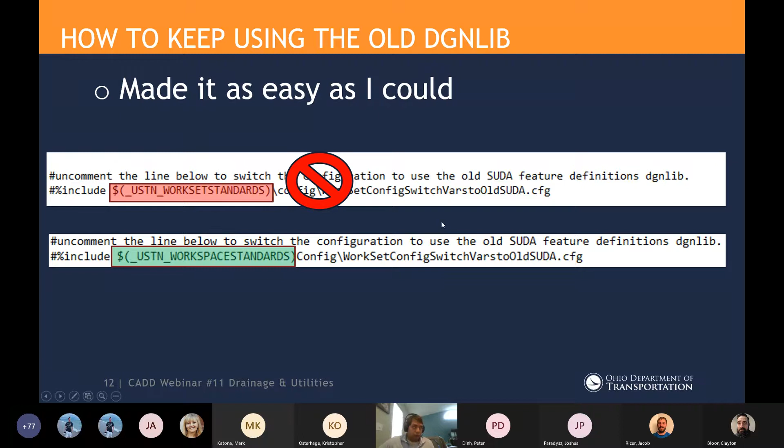Feel free to reach out to me. I've been kind of afraid to push out this DGNLIB if you haven't been told, because the break when I push it out is a little worrisome to me. So I've been holding off on it, but I think it needs to happen. There's a lot of good stuff added in the new version.

So when will I do this? Really soon, hopefully. I'm in the middle of still writing some documentation, but I will put out a mass email to the DRC mailing list to let everyone know before I push it out and what needs to be done on your current setup. This right here is how you can sign up for our mailing list if you're not on it.

Another thing I've been toying around with is releasing the DGNLIB alongside 2020 Release 3, but I might not do that now that I've been testing 2020 Release 3 of ORD.

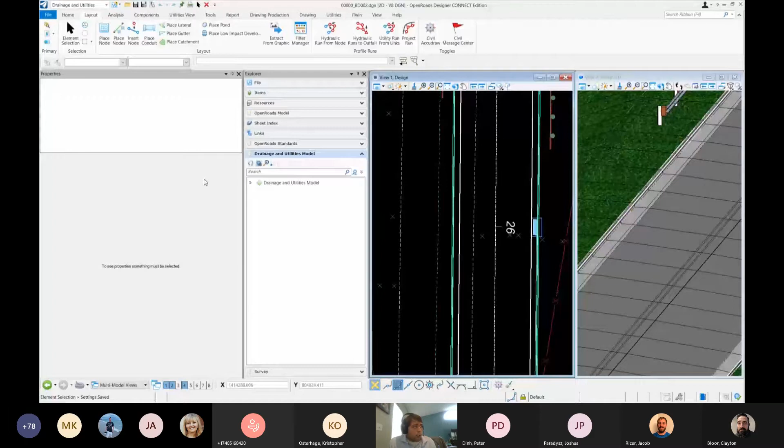So now let's get into actually placing something. We're going to use Civil AccuDraw to help us place this, and we almost have to do that if we want to annotate station offset later on. Let me come up to the tools in the drainage and utilities workflow, and under the layout tab you're going to see a whole bunch of layout options. So we're going to go over the place node, since in order to place conduit, you've got to place that node first.

I'm going to select that tool, and then we're going to select the feature definition, which is the driving factor between everything we pretty much model in ORD. I'm going to grab the CB3 curb and gutter proposed feature, and you can give it a name, so I've set it up to be D-1, and that'll auto increment as you place more. Depending on what version you have installed of ORD, that dialog might look a little different, but overall it's the same. I want to make sure I turn on my Civil AccuDraw.

I just toggled that on. I want to make sure I'm on the station offset ordinate, so that's like an assist to the tool — it's going to assist me in placing it.

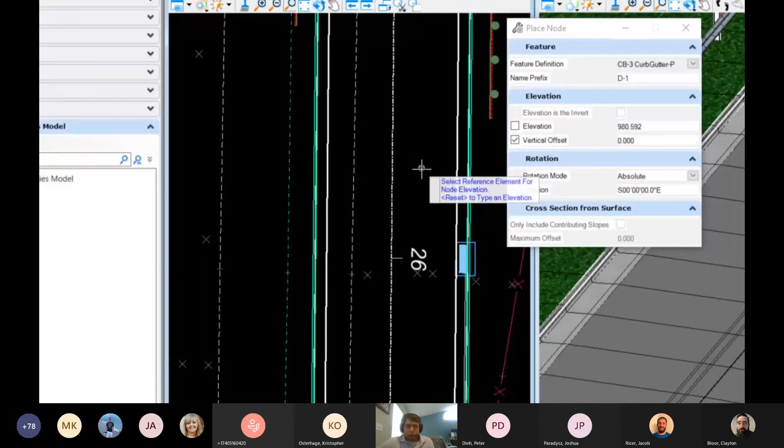Now it's asking me the reference element for node elevation. This is what you can use to pull the elevation, to place that ground elevation of your catch basin. I'm going to actually select my gutter line to grab the elevation, since I know that's where I want to grab it from. So I'm selecting that gutter line, and it's going to use the elevation of that gutter line to place the top of my catch basin.

Now it's asking me if I want to put in a vertical offset. Here's where I was talking about depressions — if you want that half inch depression for your catch basin on your curb and gutter, you want it to be half an inch below that gutter line. So I'm going to type in a negative, and you can do simple math like I just did, 0.5 divided by 12. That's going to say go a half inch below that gutter line elevation. So I'm going to click to accept that.

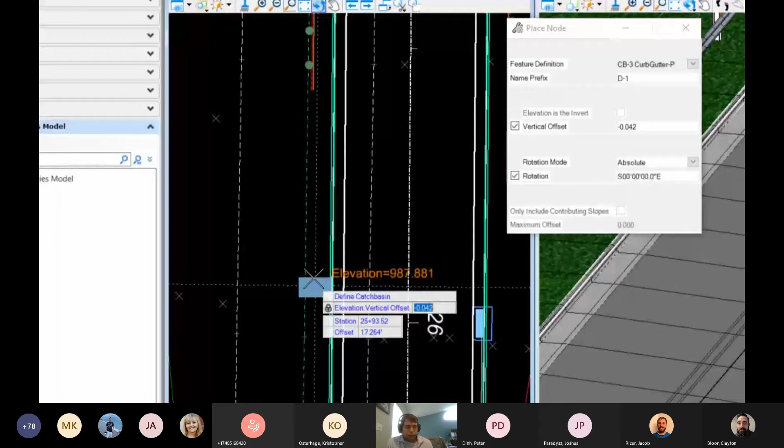Now I can use Civil AccuDraw to help me place this. I have Civil AccuDraw toggled on, so I'm going to toggle over to that. I'm going to hit the O key to select my reference, and then I'm going to key in the station I want and the offset that I want. I'll lock those in, and then I will click to accept.

Now we have the next option, which is the rotation. There are two options: absolute or relative to alignment. This was added, I believe, in 2020 release 1, which we should all be on — the option to rotate about an alignment. This is really cool because now I don't have to figure out the absolute rotation I need. I can just select relative to alignment and choose the center line as the rotation reference.

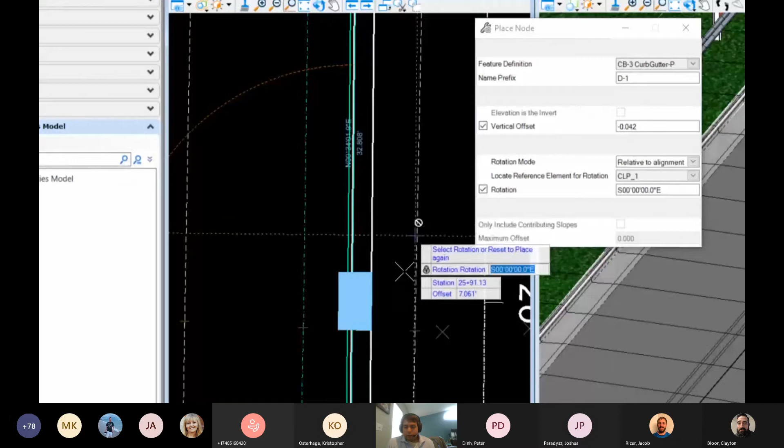Now if it's coming in at the right rotation, that's great, but if it came out like maybe 90 degrees off, then you could just key in 90 degrees and get that rotation set a lot better than what it was before they added that feature. So I really do like that feature — it made it a lot easier to place.

After you set your rotation, you're going to click, and it's going to place that in 3D and in your 2D plan view. So on my 3D side, you'll see that it is below the gutter. That's because we did add that 1/2-inch depression.

So we can come in and shoot that gutter down right there. I did go over that in the February meeting. I don't think we have time to go over it today, but maybe I'll have a video on our wiki page to show that. But mainly, that's how you place a node.

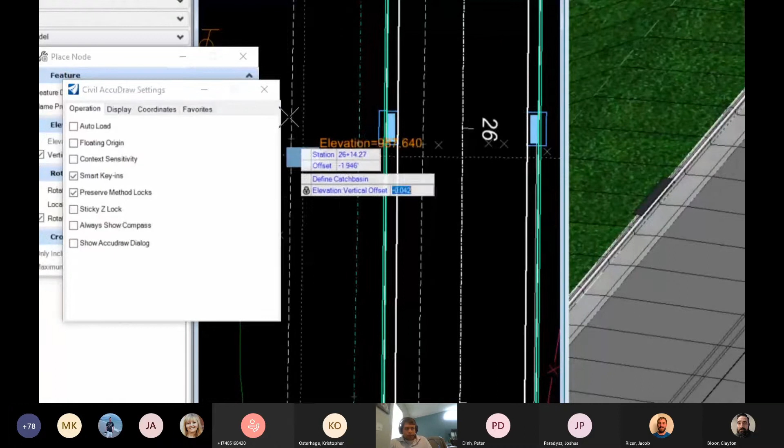So let's place another one. Another thing I wanted to point out is in our Civil AccuDraw settings, if you have floating origin checked on, you'll notice that when you place your next catch basin, it loses the reference to the center line. With floating origin on, it's going to use your last click point as the new origin point. Honestly, I would check it off—it doesn't really make sense to be on, because when you do station offset, it doesn't make sense. So if you're running into that snag, that's what's going on. Just check that off and it'll make it a lot easier.

So I'm going to come out here and place another one. I wanted to mention that if you're going to switch sides, make sure you reset click and choose the new reference element for your elevation, like I'm doing here, because it's going to remember that from the first one you placed, since you never got out of the tool. So if you switch sides, don't forget to switch that reference element for your elevation.

And you don't have to use that line—you can use a surface too. You don't even have to use an element; you could type in the elevation you want for your top of catch basin or manhole. So if you reset click, you can type in the elevation. You've got a lot of capabilities there. I'm just using that line because I know that gutter line is the elevation I want to hit, but you can definitely use any surface available to you, even the existing terrain.

All right, so I'm going to place another one in here. I think it went like 100 feet, and I'm just going to place that. So we need at least 2 nodes to place our conduit, right? So I place that in.

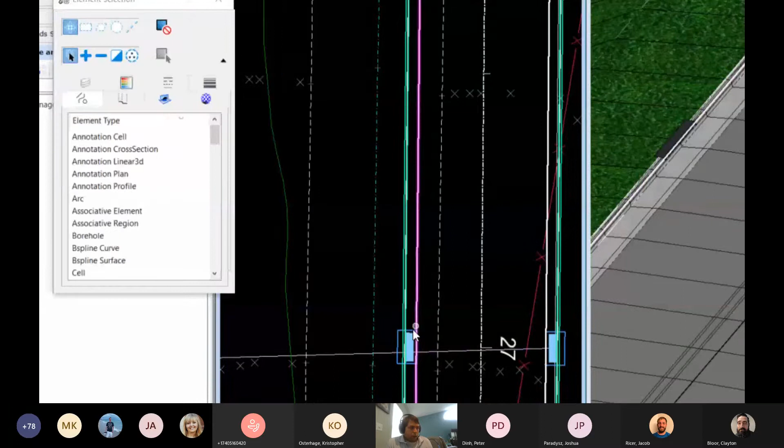And now we can select that node and easily modify it after placement. There's a ton of properties there—you see the invert elevation, the vertical offset. Notice the ground elevation is grayed out; that's because it's tied to the reference elevation element you selected. So if you cleared out that elevation reference, you could actually key in that elevation if you wanted to. You can easily select that node and move it around—they've got little heads-up arrows. You can even click on that station or offset number and key in a new value if you wanted to. So pretty easy to edit.

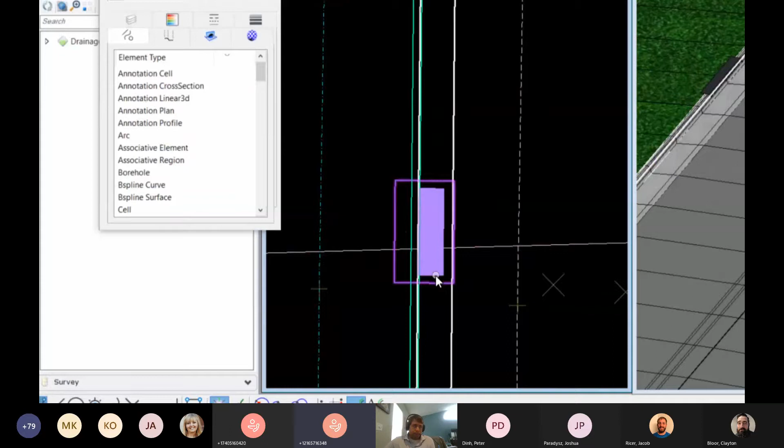You can also open the utility properties, which gives you a lot more on the utility or drainage side. One thing I want to mention is in the utility and drainage properties, I'm making use of the notes field for annotation later on. The new dgnlib has the notes filled out, but that's typically what we use to annotate in the profile view. If you're using the old one, those aren't filled out, but you can easily fill them out, which I'll show later.

So now I went over to place conduit, and now I'm going to place a conduit. We're going to set the feature definition—here's where you can see all the different feature definitions. We have type A, type B, type C, and so on. I'm going to choose, I believe, the type B round.

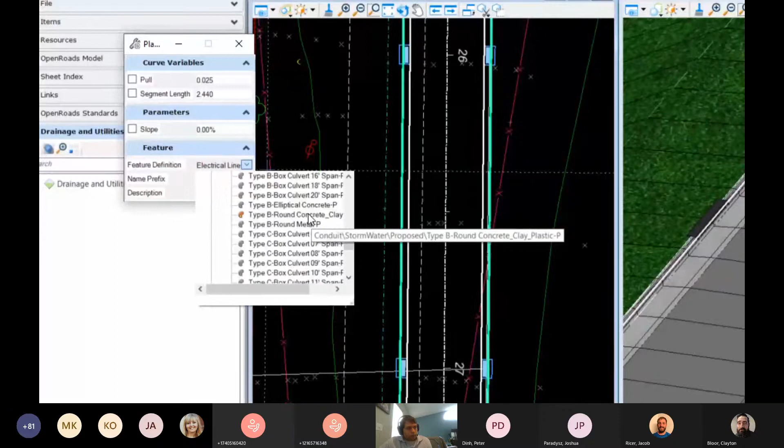So I select it, give it that name, just like for the conduit. And then the description is actually the size. You can see the type is coming from a conduit catalog, telling me it's using what we defined on the prototype. So the old DGNLIB, you wouldn't see that, it would just be set on the feature definition. But that's what you should see now.

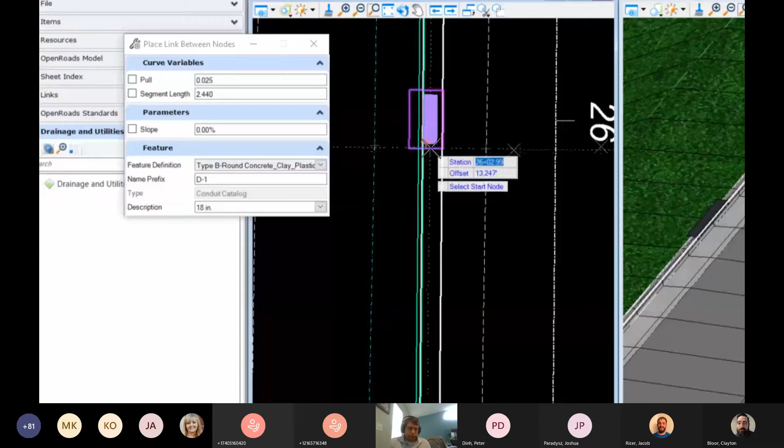So I'm going to choose my size, and then I'm going to place this. The way you place it is you choose the connecting node, and on that node there are connection regions set up, basically the area that you can connect to on this node. When I made them, I just threw it to the center of each side. On hindsight, maybe I should have made it wherever you wanted to place it, but I could change that if desired.

Right now it's just going to snap to the center of the side that you're on. So I'm going to click and place that, and I will have the conduit placed now. I think I had the level turned off, so it will place a line in 2D and model it in 3D, which I'll show here in a second.

Forward a little bit. Yep. So you can see when I rotate it around, there's the 3D model side of it, and there's that 2D plan.

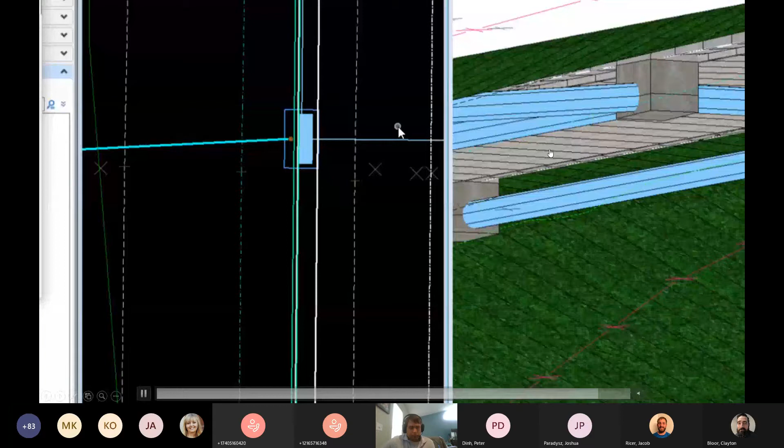So what I wanted to mention is right now I've got a service request into Bentley, but the way the software works is you're going to want to set the catch basin invert last. So what I should show here, I'm going to change the pipe invert, and you're going to see that as you change the pipe inverts, the node is going to move with it. If you have the node going down lower or something, you're going to see that change when you change those pipe inverts.

So the right way is to set the pipe inverts, then set the node invert. Now, if your node invert is just going to be the same as your pipe invert, then you don't really notice it. But I do have a service question with Bentley on that one because that does get a little bit annoying. But so that is the gist of placing it. It's actually fairly simple to model.

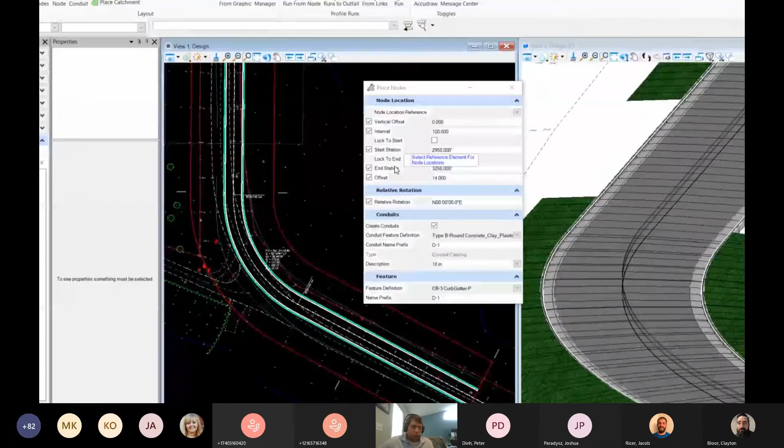So I did want to show a new tool here. This tool is new to ORD 2020 Release 3, which just came out a couple weeks ago, so we are testing that right now. It's not really in use in the districts just yet, as we're still going through and testing it. But the place nodes tool is actually pretty cool, so I figured I'd show it so you guys see what it can do when you get the next release.

It basically allows you to place multiple nodes all at the same time, and even place conduits as well at the same time. So this is really good if you're going to go along a gutter line or something, where you've got a bunch to lay out every maybe 100 feet. So I figured I'd show it real fast.

All right, so in here I'm going to set that vertical offset if you want that depression added to your catch basins. Then I believe I'm going to set my feature definitions, which is already set - the feature definition at the bottom there, CB3. Then if I want conduits, you check on conduits, and you can choose the feature definition to use for the conduit, as well as the size. Now, since it's placing it all at once, you really can only choose one size and one feature.

So to use this tool, it's pretty easy. It's asking for the reference element for node location - note it says location, not elevation. So I'm going to select my center line for the node location. And now it's asking me for the elevation, which is what we just saw in placing a node, so I'm going to use that gutter line again, just as I did before. So I'm going to come in here and select my gutter line.

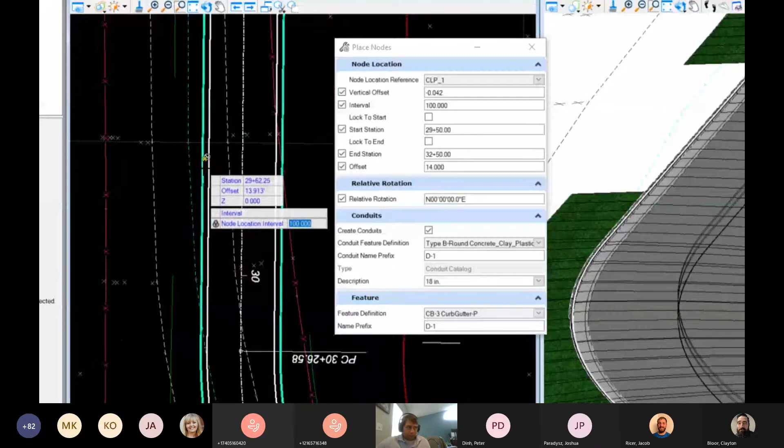So you had one more option there, and it was the location reference. That's what you're going to use to kind of lay out multiple nodes - it's going to follow that location that you selected. So there I am selecting that elevation. Now I can set the interval, so how often do you want your nodes - maybe every 100 feet. So click to accept that.

And now, where do you want to start? What station? So you don't actually need Civil AccuDraw for this tool because it's built into it. Kind of, not Civil AccuDraw isn't built into it, but it's generally the same. It's asking you for a start station, based off of that element for the location that you selected in the first step.

So I'm going to select that. You notice a graphic's going to start popping in there. And then after I select the start, then I can select the end station, however far down I want to go. And then I can set the offset, so how far do you want to offset from that location reference?

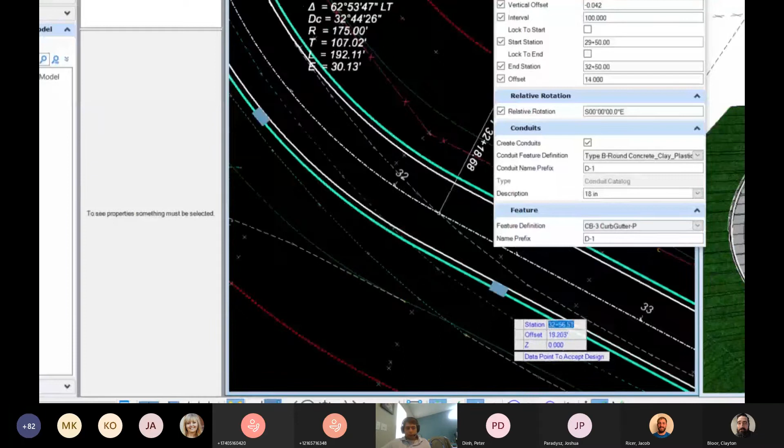So 14 feet. Okay, so now you get that same rotation option. And granted, this is where that relative to alignment rotation option really shows its power here. I noticed that my rotation was flipped off 180 degrees, so I flipped it, and I got that rotation set right now. So I'm going to click to accept that rotation, and then one more click to actually accept the whole thing.

So I should be doing that right now. It's going to go through, it's going to place all those nodes and the conduits all at once. So you can see those conduits come in as well. So it's a pretty cool tool.

So again, that's not in what you guys have right now. You don't have this tool, but it is in 2020 release 3. So after we're done testing it, we're going to vet it out, make sure there's no real problems with it, and then we'll see about pushing it out to everyone to have.

So again, you can look at the properties here. These are just the same as what we did in the previous video. You can easily move each individual one around all you want. They're just showing you some in 3D that they did place.

All right, let's move along. Okay, so that's really the placing that I'm going to go. And now I'm going to go into kind of setting up for sheet creation.

So the first thing is profile runs and projecting those runs. And what does that mean? So those drainage elements, that network that we just placed, they're each individual pieces. You've got nodes, you've got conduits, right? That's when we go to create our plan profile sheets, we want to show that on our centerline profile, right? So what we need to do is actually project that drainage network onto our centerline.

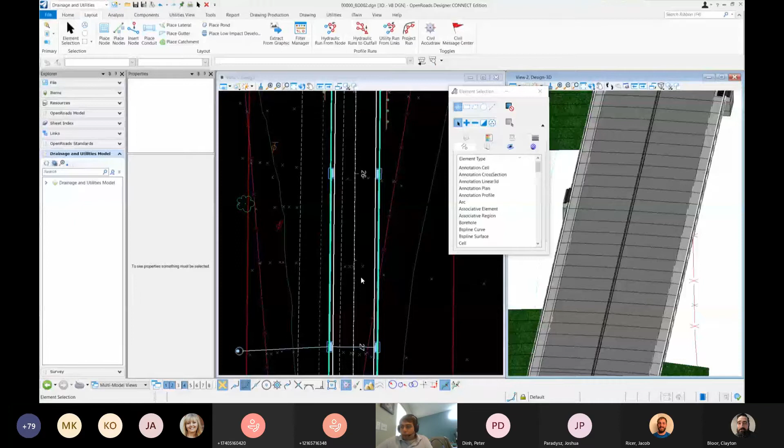So the way we're going to do that is by creating a profile run. That's basically saying, this part of the network I want to create a run for, and then we'll use that to project it on. So there's these tools here: hydraulic run from node, hydraulic run to outfall, utility run from links. Those are your tools that you can use to create profile runs.

Okay, so I'm going to go over two of them. The first one is that utility one. This one's the simplest one to use. You pretty much just select your conduit. So when you're in here, you can select the feature definition.

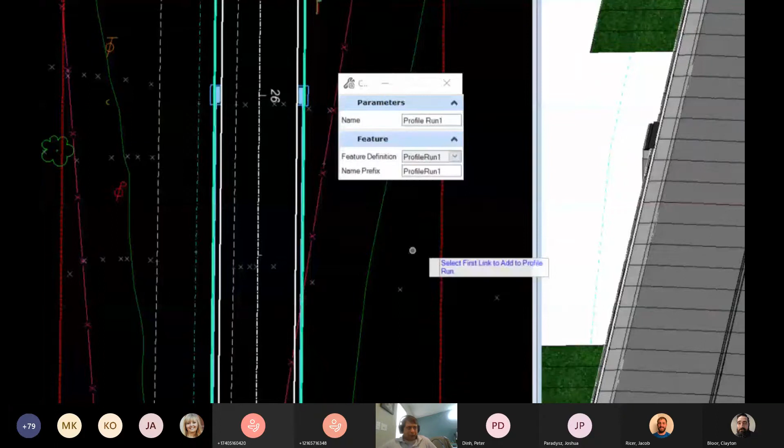So I have created some new feature definitions here that I'm going to be releasing, and it's under the profile run. So I just created 4 of them. It's going to put it on a scratch profile run level, just to kind of separate it out. Okay, so after I set that, I can give it a name. I think a lot of people do like node to node as the name that they choose. I'm just going to leave it as profile run.

But all you do is you select a conduit, and then you can just select all of them in the network. Now they do have to connect to each other. You can't go and select like a conduit that's not connected off on another side. So if I come up to the top, you'll see it won't let me select that one. It's got to still make sense, it's got to be able to run along that profile run.

So you simply just select all the conduits in the order you want it, and then when you're done selecting, you could just reset click to finish it off, and that will create a profile run. So if I look over at my property or my level display, you should see there's a new level there, scratch profile run 1, and it's actually a lower priority than the pipe, so it's actually below it.

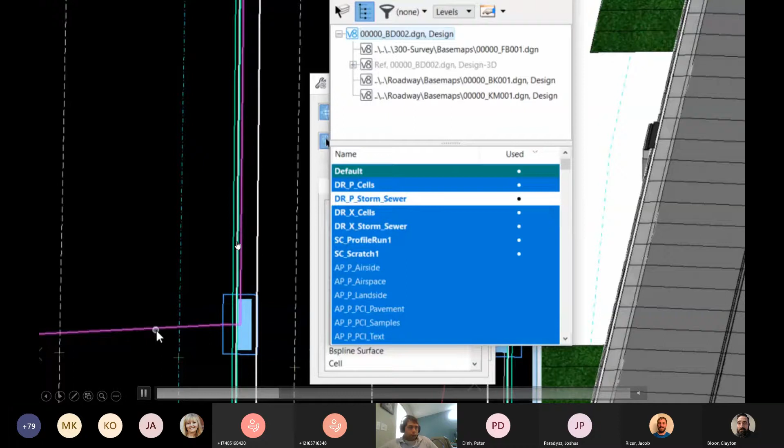I figured it was just getting in the way when it was above. So if you turn off your storm sewer, you can then hover over and you can see there's that profile run. So you're not really doing much with that, it's just there if you need to help select it to use tools like projecting a run.

If we go over to our Explorer, to the Drainage and Utilities section, you'll see there's a profile run. I already had some in this file before recording, but we did just create one, I believe, in the last video. So you can open up the profile run and look at its profile.

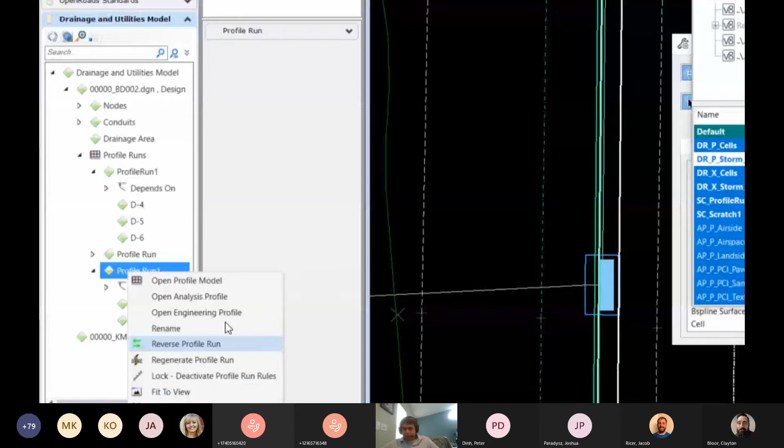If you right click on here, there's a bunch of different options, like opening the profile model. You can even reverse the direction, or fit to view. There's a couple different options there, but we're not going to go over all of them. Some of them pertain more to the analysis side, which we're still setting up, so that'll be coming later.

What I want to do now is go over another method. That first one was kind of manual, where you select each one. But with the hydraulic run from nodes, you can just select your nodes and it'll close it for you. The other option is you select it and it'll follow all the way down to the outlet or outfall. I'm going to go over the first one here.

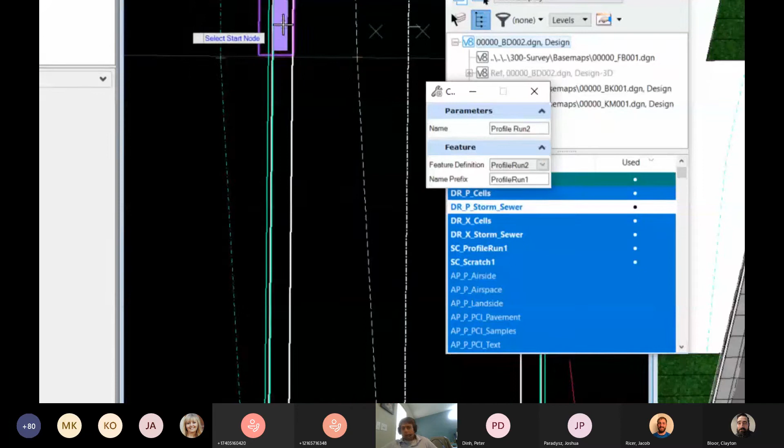I'm going to choose that and select a feature definition. Again, I recommend using the profile run ones. You can give it a name. But this time, instead of selecting the conduit, I'm going to select the actual nodes. So I'll select the begin node, then come down and select the end node, and it's going to figure it out for me.

It's highlighting that drainage network, going from one node to the other. So it's a bit faster - you don't have to select each individual conduit. Then you just click to accept that and it'll show up in your profile run section.

So that's really one of the steps you need to do to get it to show up on your center line - you need to create these profile runs. The next step is to project that run onto your center line, because ultimately that's where we're going to create our plan and profile sheets from.

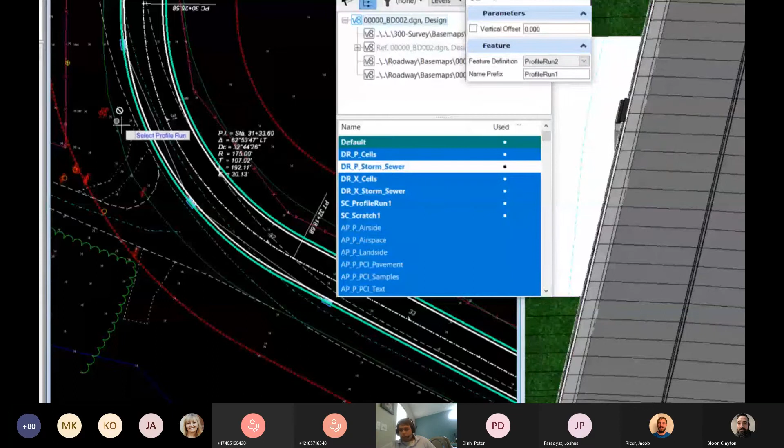To project it, again in this tool you have a feature definition you can set - honestly, I would just use the same profile run feature definition. In this tool, you simply set your feature definition, select the profile run you want to project, and then select the center line you want to project it to. So we're literally projecting our network onto our center line, and we're doing this all in our drainage file.

And that's what I'm going to recommend - you do the projections in your drainage file. Technically, you could do these projections in different files, but I think it's going to work out easier and better for you if you do it in your drainage file.

So here I opened up my profile view for my center line, and now, since I projected that profile run onto my center line, I see that drainage network on my center line profile. It's projected and linked, so if you make a change, this will change too. That's kind of the first step of setting up for sheet creation - we do need to show this on our center line when we get to plan and profile sheets.

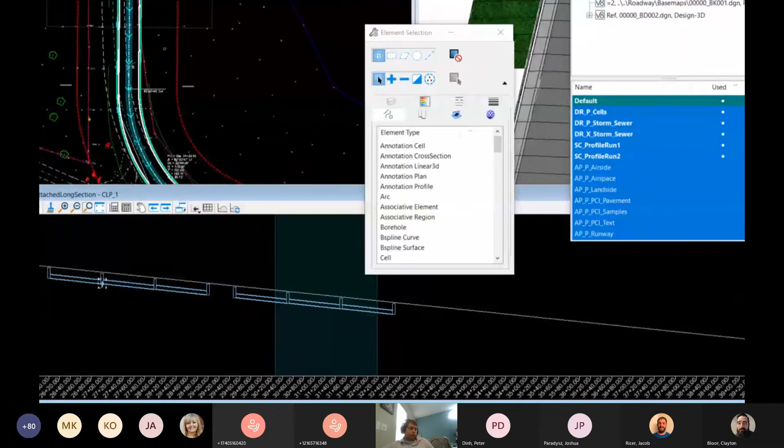So there I turned off - you see the profile run levels are showing up there as well. You can probably most likely turn those off. I believe, what else was I going to show?

Okay, so next, that's good for showing drainage networks going along the alignment, but what about crossing pipes that are crossing the road? We can do that by creating a 3D cut. In our profile view, there's a button that says 3D cut or create 3D cut, and what that lets us do is define an area where we want to show the 3D model at that given location, so if something is crossing your profile, it's going to show it.

So I did it by the method by corners - you can choose 2 corners, and you can see I'm getting everything from the 3D model that is crossing my profile at this location. Now I can see that crossing pipe come in. Now I probably don't need to show those little levels at the top here.

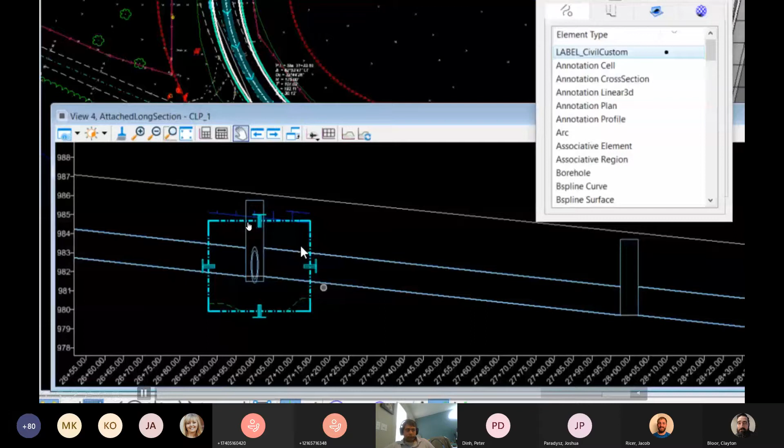So I can resize it. But you notice when you resize it, it didn't really update. You have to use this refresh 3D cut button anytime you make a change. So if you resize it, come here and hit refresh 3D cut.

So it's a static cut that is updated by that refresh button, and that's just for performance reasons. Same thing goes for level display. If you want to turn that level off, you got to remember to hit that refresh 3D cut button. So I turn off the ground line, come in here, hit the refresh button. Now it shows off.

Okay, that's working. All right, so that is pretty good setup for getting ready to cut our plan profile sheets here. So we should move on. Did I forget?

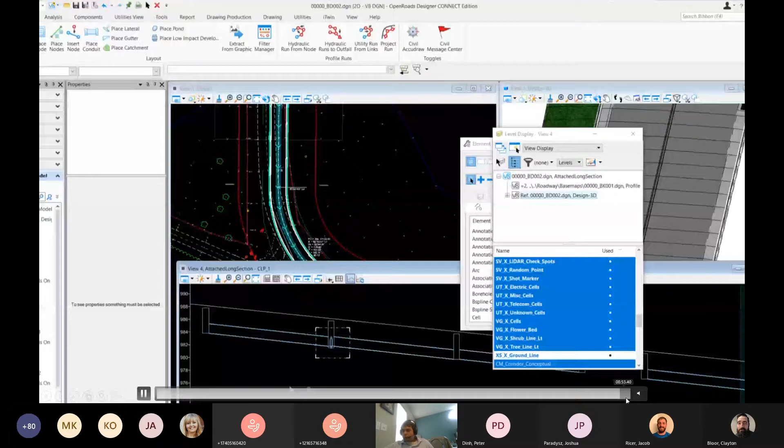Yeah, so again, just to reiterate, we're doing this in our drainage base map file. I highly recommend you do that in your drainage base map file, the projection at least. Okay, so we now have set up our drainage to show on that profile, right?

But let's actually create a sheet here. So we need to set up a drainage or a file to cut our plan profile sheets, right? So what I'm going to do here is I'm probably going to create another file. Jump forward here a little bit. So I'm going to use the Create Design Files, and I'm going to create a file to cut my plan profile sheets in. So I'm just setting up my filters.

So there's the plan and profile sheet here. So you have the option here to create a container file, like a 000 file to hold your named boundaries, and then you cut your sheets to separate files. Or if it's a smaller case where you might only have a couple sheets and you want the named boundaries to be in the same file as your sheets, then you can just put the named boundaries in that file.

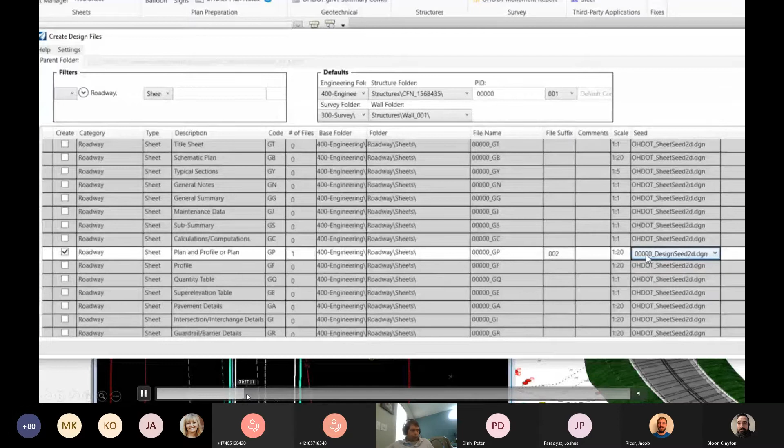For this case, to keep it simpler, just to show more of the drainage side, I'm going to put my named boundaries in the same file. So when I do that, I do want to make sure that I switch my seed file to the design 2D seed, because I need that design model to set up my named boundaries, right? So in here, I should be setting it to design, and I'll create that file and then open it up and add in my references, which I believe to save time, I've already set up.

So I'm in that file, my GP file, and I've already added my references. So field book, drainage, my alignment, my corridor file. I made my terrain the active, or my terrain model the active terrain. So it made that 3D model and self-attached it there.

All right, so I open up my profile view and I don't see my drainage stuff, right? Well, that is what I expect to see, right? Okay, so let me pause this, make sure I don't run out of time. This is somewhat complicated to explain, but once you see it, it actually makes sense.

So what I did is I referenced my BK file, right? That has my alignment and has the profile, and I drew my proposed profile in that BK file, right? So that's this alignment right here. I opened up this profile view of this alignment. So when I do that, it knows that I drew this in the BK file. So it's going to show me what I drew in my BK file, which is my proposed, right?

I did not project my drainage model onto my centerline profile in my BK file, right? So I don't expect to see it right now. I did that projection in my drainage file. Okay, hopefully you guys are still following me. So in my drainage file, I referenced in the BK file and opened up that profile view and projected it in there.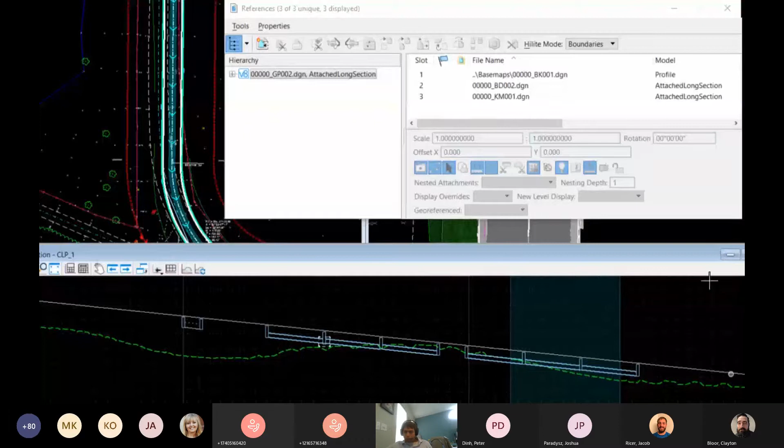Okay, so hopefully you guys are still following me. Really what we've done so far is we've created a profile run, projected it to our center line, and then in our sheet we attached that view to our profile view.

All right, and you'll see that the 3D cut comes in too. So that all comes in from everything you did on that profile view in the drainage file. So hopefully you guys are following me still.

Let's jump forward a little bit. So let's set up for sheet creation here. I'm going to go to my drawing production.

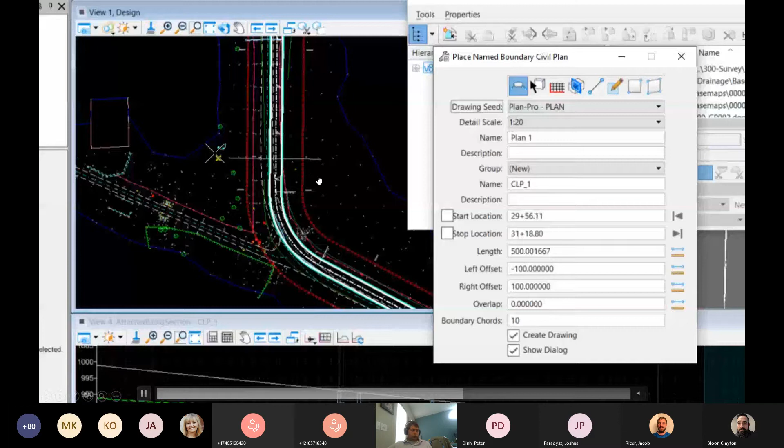I open my name boundary. I'm going to choose my plan mode, and I'm going to choose my drawing seed as the plan pro, the plan side of it. Set my scale, and then I will set wherever I want to start my sheet clipping here. So I'll just throw something in here.

I've checked on create drawing, or I'm going to check off my create drawing so I can set up my profile view before it actually creates this stuff. So I'll check that off, and then I will click to actually place the name boundaries for my plan view.

Now that that's placed, I'm going to come back into my place name boundaries. I'm going to go to my profile mode, and I'm going to select plan profile. For the profile side, I'll set my scale.

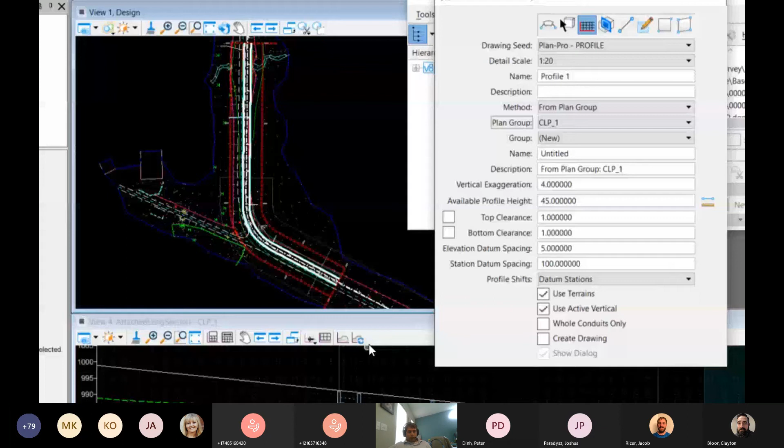And then now I want to make sure I change my method to from plan group, and I'm going to select that plan group, and that way it knows to use that to line up the profile view to match it. All right, so now I'm going to check on create drawing, and another option you're going to see with 2020 release 3 is this whole conduits only checkbox.

What that's going to do is actually force your name boundaries to basically stop at the nodes, so it gets the whole conduit. We're not going to do that in this video, but Bentley does have a good video on their wiki page that showcases how it works. It works pretty much how you'd think it would work — it just sets up those name boundaries to match up with a whole conduit.

Okay, so you can see my name boundaries kind of previewed in there. I'm going to click to move forward a little bit here. So I'm going to place those, and I get this dialog that comes up.

You want to make sure that for your drawing models, your scale matches the way you set it. And then for your sheet models, you want the annotation scale to be 1:1, but the detail scale to match the scale that you set. So this one needs to be 1:20.

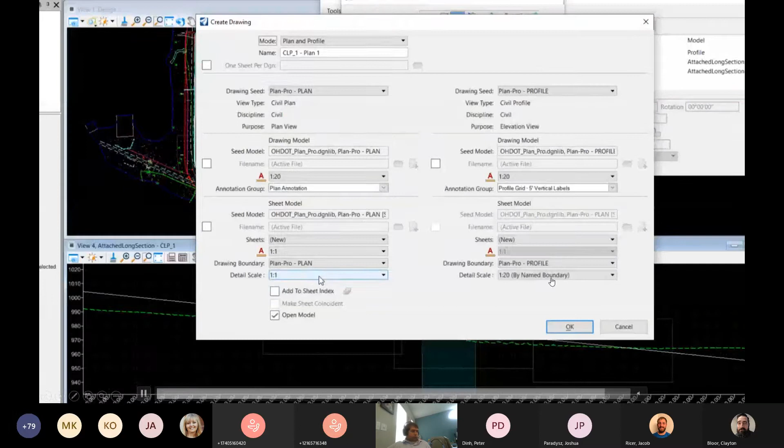And then we'll hit OK, and we will create sheets. So I think I jumped forward there a little too much. Oh man.

So you can see I just quickly showed that we have a rough plan profile sheet, and there's some auto annotation going on, which I'm going to go over in the next couple of videos.

Okay, so now I wanted to — what did I do? Plan.

Okay, so profile run sheets is the next thing I want to go over. With L&D Volume 3, the recent update we had, we kind of changed the way the requirements were for showing drainage on cross sections.

So you no longer really need to project the drainage structure to the nearest cross sections. In fact, the software can't really do that to begin with. But in lieu of showing all that stuff on cross sections, you can create profile run sheets. So I wanted to quickly show how to do that. So, if you guessed it, we're going to use the profile run that we created to create the profile run sheet, right?

So I'm in my base map file again here, and I'm going to do some setup for my profile run. I'm going to open up my profile run, the profile view of it, profile run 2. You can see there's existing ground physically along this profile run. This is not a projection to the center line, this is the actual location of ground along this profile run.

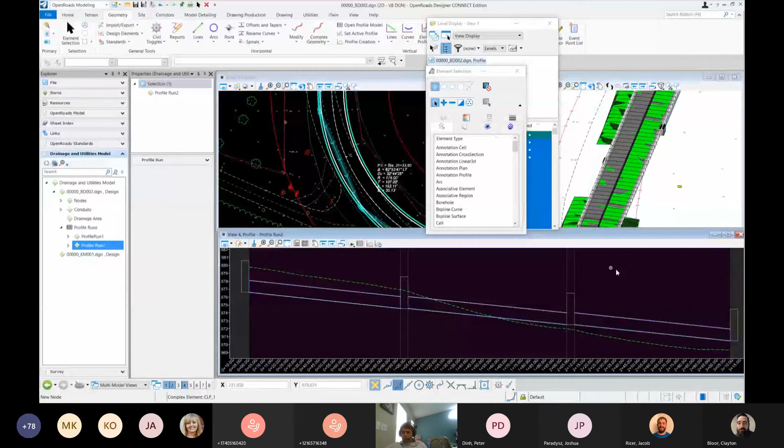But what I don't see is the proposed stuff. So we're going to get our proposed profile and have it represent the true elevations along your profile run, not along your center line, but actually along your profile. We're going to make use of our mesh on our corridor, but you can use any surface you might have. If you just modeled an area like an intersection, you can do this process too. But when you use your corridor, make sure you bump the design stage up to final with meshes, because that's what actually draws the top mesh we're going to use.

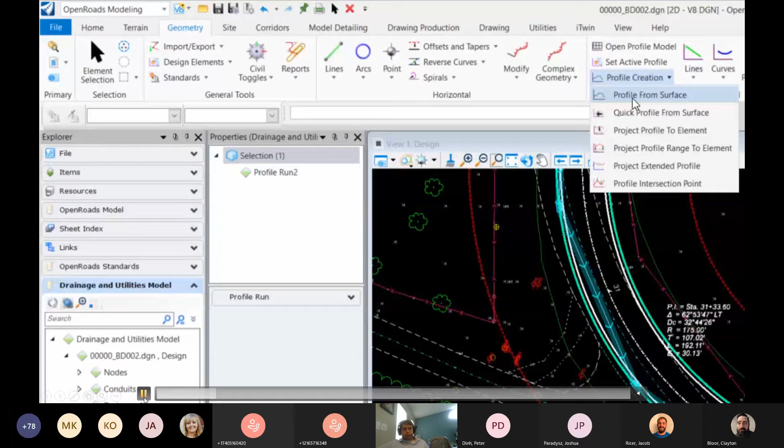So what we're going to do is create a profile from surface. You could also use quick profile from surface, they both do pretty much the same thing. We're going to create this profile and use our top mesh as a surface. I did add a new feature definition here under linear profiles - there's one for grade line. You're going to want to use that, or if you use an alignment one, you'll get a whole bunch of extra annotation when it comes to sheet creation. So proposed grade line, you can give it a name.

So I'm going to follow the prompts. It's going to say locate what you want to profile, so I want to profile my profile run, so I'm going to select it. I think I was just turning off the storm tool to make it easier to select my profile run there. I'm going to select my profile run because that's what I want to create the profile from the surface from.

And then I'm going to reset click. You can keep selecting multiple elements if you want to profile multiple things at once. So now, what surface do you want to select to create this profile? I'm going to come over and select my top mesh element there as a surface, then reset click to select that as a surface.

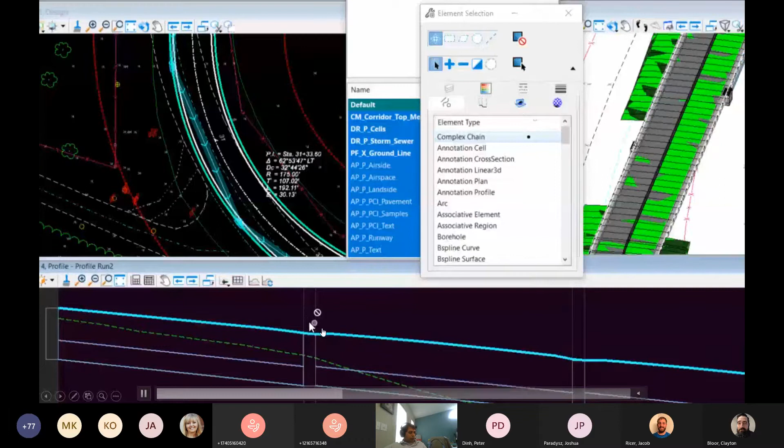This profile is linked to your surface, so if that surface changes, this will change too - it's dynamic. Now there is a little display issue here - it's showing a green line when typically it's a white line. I haven't submitted a ticket yet, but I will be to Bentley. I found that if you get out and back into the file, it's then white. I also found if you go to your settings and switch something about that profile and switch it back, then it comes in white. It's not a huge deal breaker, but I'm sure we'll get that cleared up in another release.

So that is getting our true proposed elevations along our profile run. Now we're pretty much ready to create a sheet. Let's jump forward here because this is taking longer than I thought it would - got a lot of content to show here.

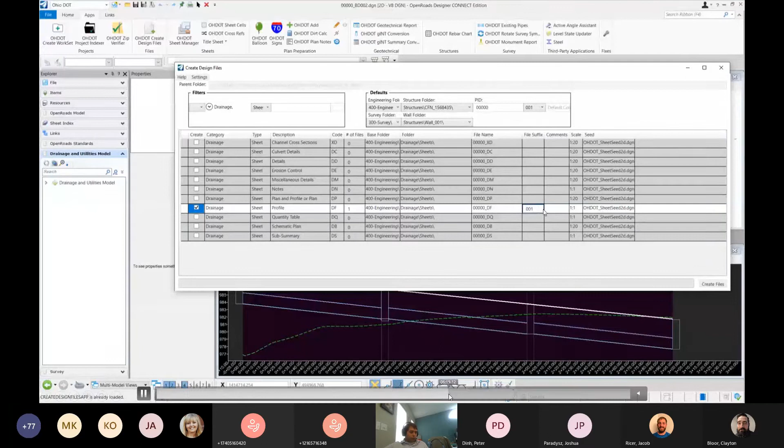I'm going to jump forward to save us some time here. So I've created that file, and I've already added all my references that I needed. And now I'm going to go place my name boundaries.

Oh, you know what, I forgot - another new thing in 2020 Release 3 is the ability to bulk create sheets. So I figured why not show this. It actually gives the ability to generate multiple sheets. So the way this would work is, say you had multiple profile runs - you could actually generate the sheets for all those profile runs at once.

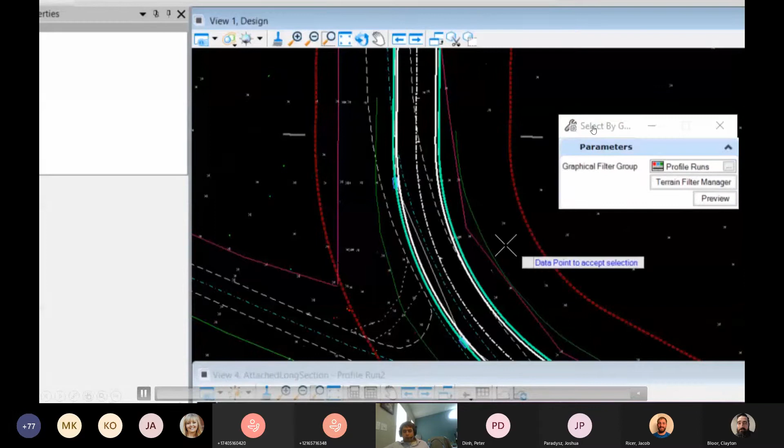First thing you need to do is create a selection set, so put all those profile runs into a selection set. I did put together a little graphical filter here in the drainage utilities dgnlib called profile runs. If you use that graphical filter, it will actually select all your profile runs for you. Now that is contingent on you using one of those 4 profile run feature definitions when you made the profile run. So now with that selection set made, you can see I have 2 profile runs selected there.

So now I'm going to come to my drawing production and set up my name boundaries. I'm going to select a profile-only mode here - you could do pro-pro or profile only. If you wanted to stack profiles, you could do the pro-pro. You can set your scale. And now what I want you to see is your method still has station limits, but if you see the name, it says multi-select mode - so it already knows that you're in a batch sheet creation mode. I want to point that out.

So now what I'm going to do is come down and check on - jumped too far forward - so in my profile view, I'm going to pretty much click. It really doesn't matter since you're in batch mode, it's just going to do the whole profile run. So you see here, now that I've clicked forward, it went to the first profile run and it gave me that dialog.

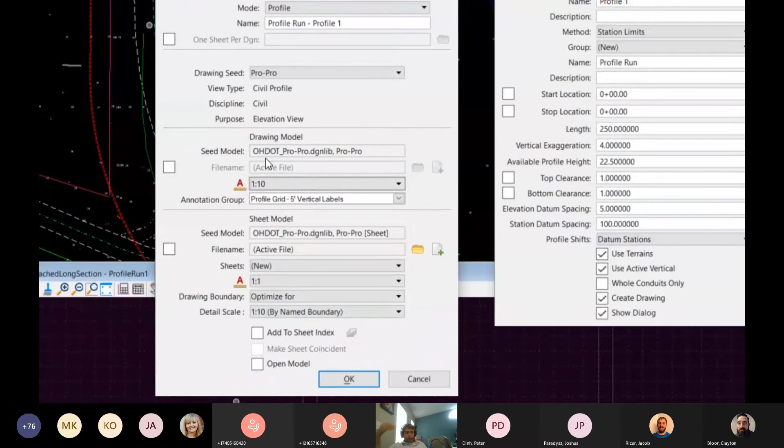So if I checked off the show dialog, it would just generate all my sheets. But since I had that checked on, it's going to pop up for each of those name boundary groups. So here's my second one - I had 2 selected, right? I had 2 profile runs. So it's going to show up for each of those profile runs that I had selected. For me, it was only 2.

All right, so now it's going to run through and create those sheets. So if I look at my models, you're going to see I do have 2 sheets there - one for my first profile run, one for my second profile run. Now, granted, if you had longer runs that would go on more than one sheet, then you'd have more than one sheet. But there's one of those profile runs.

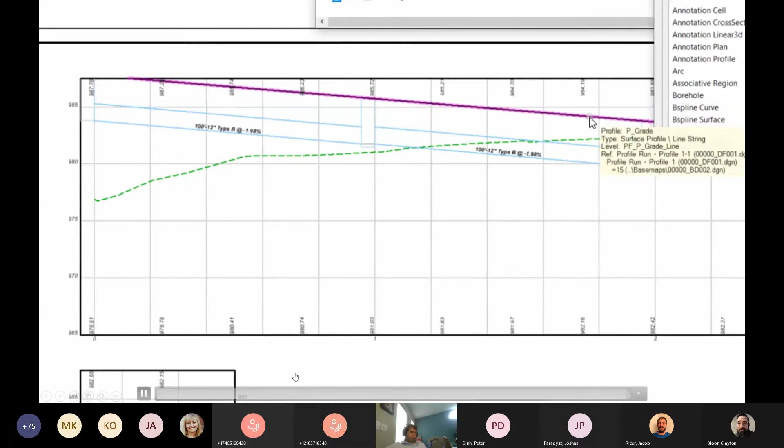So open up that sheet, you can see there's some existing elevation, and then as long as you use that feature definition when you created that proposed grade line, it will annotate the top strip grades too for the elevations as well. So that was real quick, creating those plan profile sheets and profile run sheets.

Now I want to dive into annotation here. So I will say, as I've been testing 2020 Release 3, there are still several defects and enhancements that I'm waiting for. For starters, element annotation is just not working when you cross-reference. Annotation across references in general breaks every time you reopen the file until you actually open a drainage property. But I will say you no longer have to close and reopen the file to have it read the drainage network properties. So I've been in contact with Bentley on these issues, and I'm hopeful we have a solution coming up soon. I was kind of disappointed, but we're almost there to where I want to be with drainage. So I'm going to go through the annotation and what we can do with what we have right now.

All right, so first off, plan view.

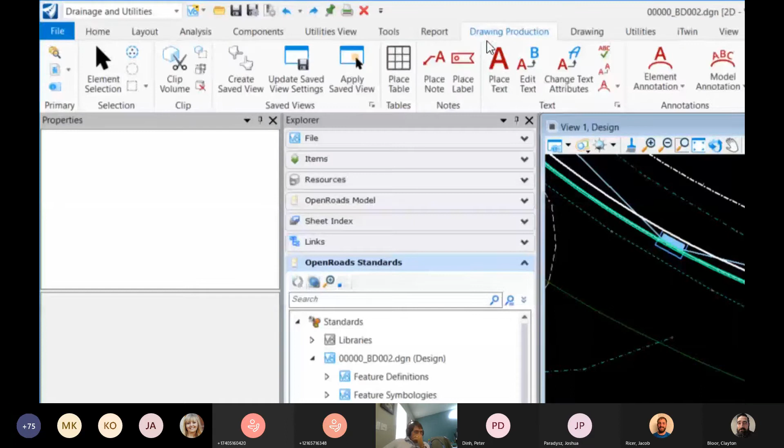So this is in the new dgnlib. I've added some element annotation to the feature definition. What I mean by element annotation is the actual element annotation button I just selected.

The way this works is if you set up the feature definition to know how to annotate that element in different views like profile or cross section, then you can select that element and have it annotate. So I selected that conduit, and you'll see it annotated with the direction of flow, the size, and the type. Again, I mentioned that type earlier.

It was coming from the notes property. Size is obviously coming from the size you selected. So right here, I'm going to select the conduit and switch the invert for the stop to flip the flow, just so you can see that the arrow will automatically change. So here it just changed automatically. That is working great.

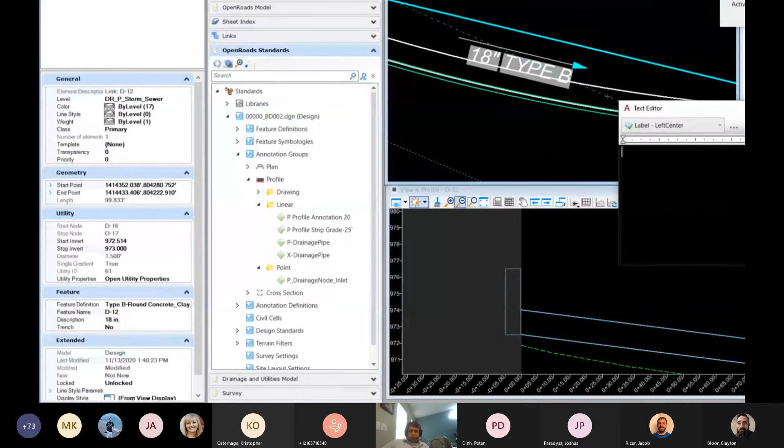But now I want to remind you that I am in my drainage file. So when you start going to the reference, that element annotation just isn't working as smoothly. I'll go over that for the profile view, kind of the workarounds. But this seems like it's okay to put this in the drainage file for now. It's going to go with the rotation of that pipe, so putting it in your drainage file isn't going to have a negative effect. And when you change your drainage model, it'll update in this file as well.

So that's with the new dgnlib. If you don't have the new dgnlib, I do have a text favorite out there. So I just selected that text favorite. Now it won't do the arrow because it needs to have that element annotation set up.

So for the new dgnlib, the arrow will be there. But if not, and you're using the old stuff, you can at least use that text favorite to kind of get started.

In here, I'm just going to remind the type B is coming from that notes property. Again, if you don't have the new dgnlib, these aren't pre-populated. So what you can do is actually just fill them out in the properties here, or you could even open up a flex table and kind of more tabular edit them, which I believe I show right now.

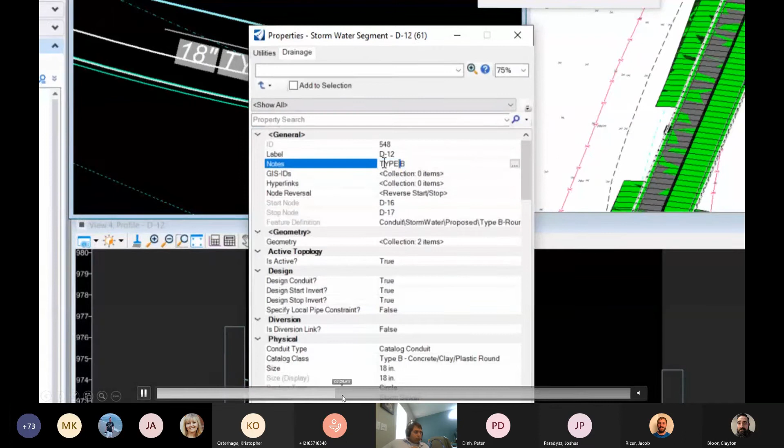So if you go over to the Analysis tab and hit that flex tables button, it's going to bring up this flex table dialog. You can double click on the conduit table, and if you scroll all the way over, there's going to be a notes column. So that might be a little faster to fill out.

This is more so for the existing projects. If you don't have the pre-populated data, that's one way to do it. So I figured I'd show that to help you guys out. Same thing goes for the nodes, for annotating the nodes.

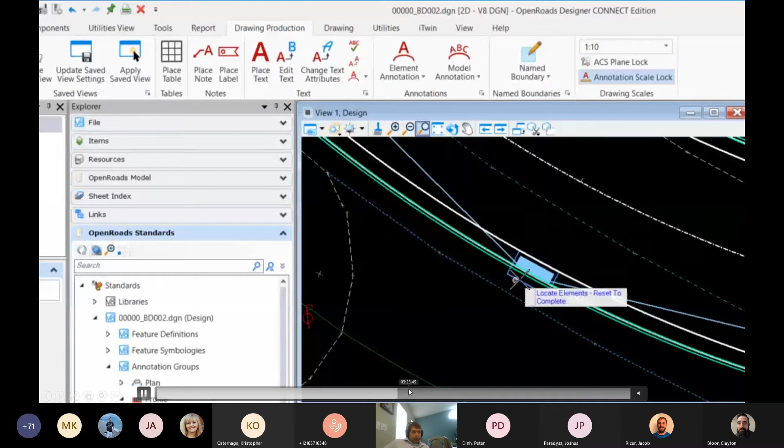So now I did set up element annotation for callouts on a node, but I'm still playing around with it. As you can see, it really just didn't work. It's not what I need it to be just yet. I'm trying to get to the point where it just auto annotates all this stuff, but we're not there yet.

So you can just do place label. If you use place label, you can choose a cell option, and there's a feature name for the cell name right there, and you can place a callout like that. This is pulling from the feature name. So if I select on that and look at the properties of that node, you'll see the feature name right there, D-16. That's where it's pulling it from.

So you don't have to do your callouts like that - that's one way you could do it. But I wouldn't do the callout in the drainage file, just for the rotation of the text. I would do that actually in your sheet or your drawing model.

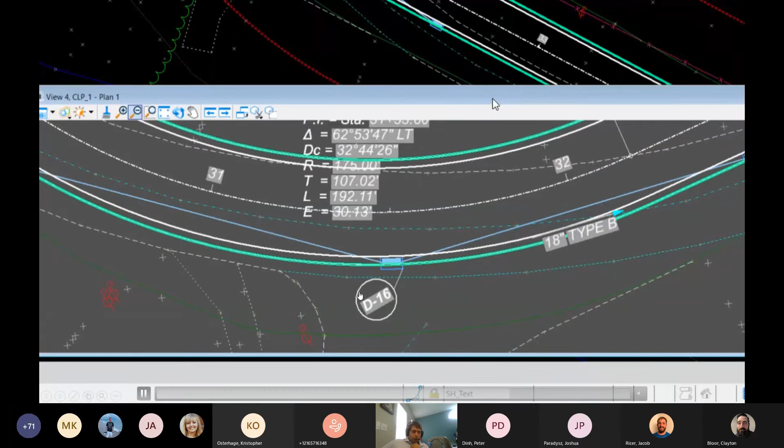Okay, so that's kind of plan view annotation here. Let's jump over to our sheet file that actually contains our sheets. I'm in my drawing model for my plan view, my plan and profile sheet that I created. You can see the annotation coming through from what I did in the drawing in the drainage base map file. So you can tell that you wouldn't really do a callout like that because of rotation.

You wouldn't really do that. So what I did with the place label on that node, I would do that here in this drawing file, right?

So I want to pause right here. I'm in my sheet file, and I have not actually done anything with drainage and utilities. So when I went and opened up the properties of that node just now, I got prompted: do you want to access the drainage and utilities data from the reference file? If you hit yes, it's going to basically load in that drainage properties.

This is new with 2020 release 3 of ORD. In the previous releases, you had to actually generate a drainage and utilities project, close the file and reopen it just to see these properties. So they've kind of enhanced that workflow. Now it's saying, oh, you want to see it? Let me do this for you. So if you hit yes, it will then be able to access those drainage properties. Just want to note that, call that out.

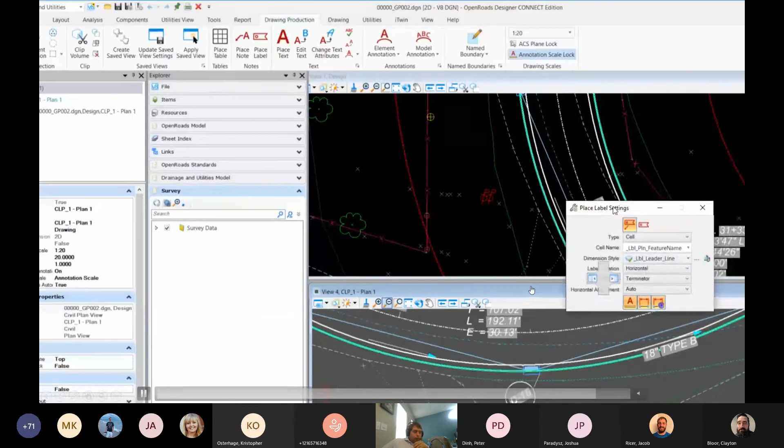Okay, so compact database, you'll get that every now and then. So what I'm going to do is place a label again, same thing I did in my drainage base map, but you really would rather put it in your drawing model here. So in my place label, I'm just going to do the same thing, and now you kind of get the text rotation the way you want it.

So that's kind of plan view. I'm not saying it's perfect, it's going to get better here, but I would do your conduit annotation, element annotation in your drainage base map for now. It's just going to work out better. Eventually, we're just going to be able to do everything in our sheet file here. And then I would do your callouts in your drawing model here.

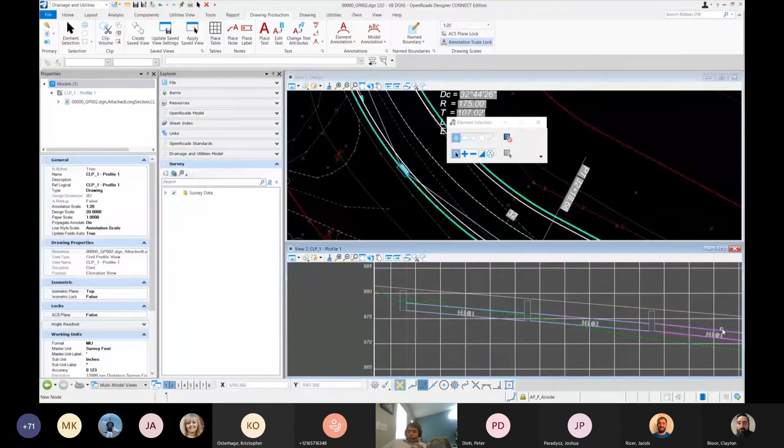Okay, so now profile annotation, let's go over that. You're not going to be able to really do the element annotation in the drainage file like I did for the plan view, because it doesn't work like that. It's a dynamic profile view. It's not really what you see on your sheet here. Like in your sheet file, you have your drawing model.

So I'm in my sheet file, and you notice that auto annotation that I had going on for my conduits - you see how they're all blank now? This is the problem going across a reference. When you place or anything that deals with a drainage property, every time you get in the file, you have to hit that drainage property so it loads the file in, and then the fields will update. So every time you close and reopen, you'd have to do that. But that's not going to work with printing or anything like that.

So it's definitely a problem, which I'll go over a crappy workaround here just to get sheets created. But now furthermore, with element annotation, just like with plan view, I can go up to the element annotation button, click element annotation, select my conduit, and it will place it.

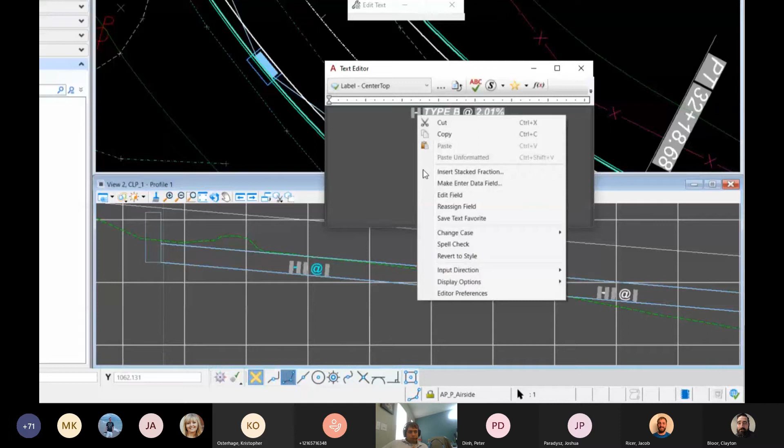But in ORD 2020-3, when it places that element annotation, it doesn't associate the fields to the conduit. So you can see I'm in here, and I'm going to right click on each field and reassign it back to the pipe, which I don't like. But for some reason with that update, something went wrong - it doesn't assign it to the conduit in the element annotation. So if you're going to use element annotation, after you place it, you got to go in and assign it to that pipe, which sucks. But that's if you're going to use it.

You could also just use place label and choose this text favorite. So if I scroll down, there should be profile, drainage pipe, I believe - let's see if it comes up. There should be a profile, drainage pipe, proposed and existing. So that feature, or text favorite I'm sorry, is the same thing that the element annotation is using. So granted, I forgot to set my symbology here - you want to set your symbology to the right one, proposed or drainage proposed text.

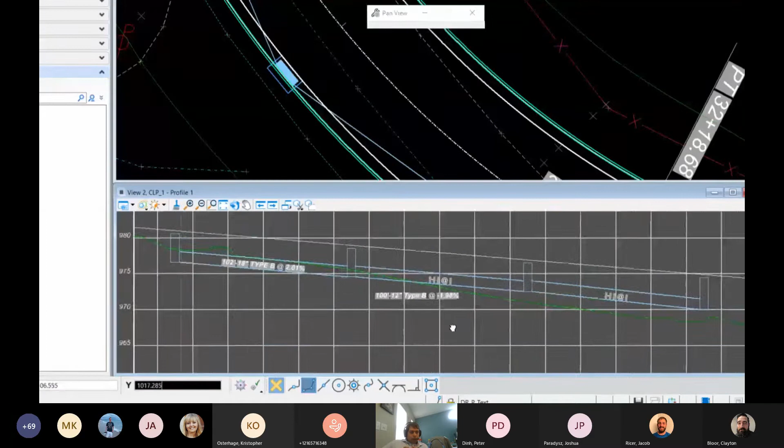So then you come in here and you can place it. Now when you use the place label, you don't have the problem with the reassociating that you did with the element annotation. Hopefully Bentley gets back to me on why it's not working, but that's just a slight hiccup there. So you can always use the place label instead. But yeah, the element annotation is where I'd like to go because you can see it automatically annotates it.

So there I did choose element annotation again, a little fast there. I'm going to click element annotation. So I've been playing around with this. For the nodes, it's a little bit more complicated because there's a lot more information that we need to do. But I did set up element annotation on this to place, so you could use that for the nodes as well.

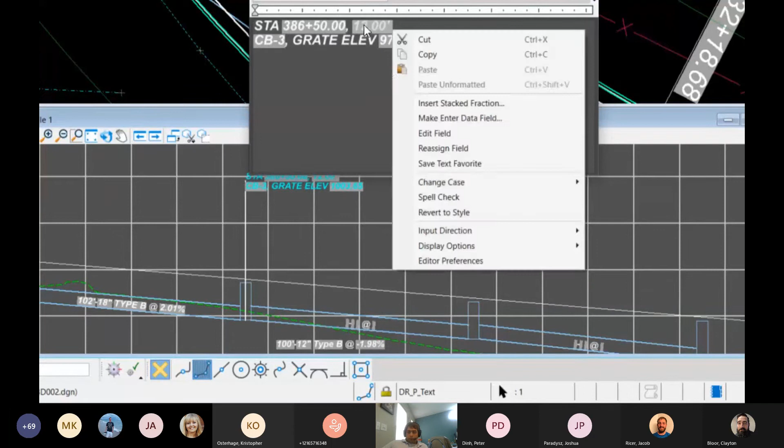You could select all the nodes and hit element annotation, and it's going to do that. But we still have the same problem where the element annotation across the reference hitting the drainage properties isn't reassigning. So after I place that element annotation, I got to come in and reassign those fields back to that element. If that part worked, it would be pretty much where we need to be. Hopefully maybe the next update or Bentley has something that will fix this, because this is what we need to keep it all dynamic and nice.

So now that didn't annotate everything, right? That just annotated information about the node. It didn't annotate anything about the connecting pipes. So right now the software doesn't expose those connected pipe properties on the node. So you have to add that stuff in.

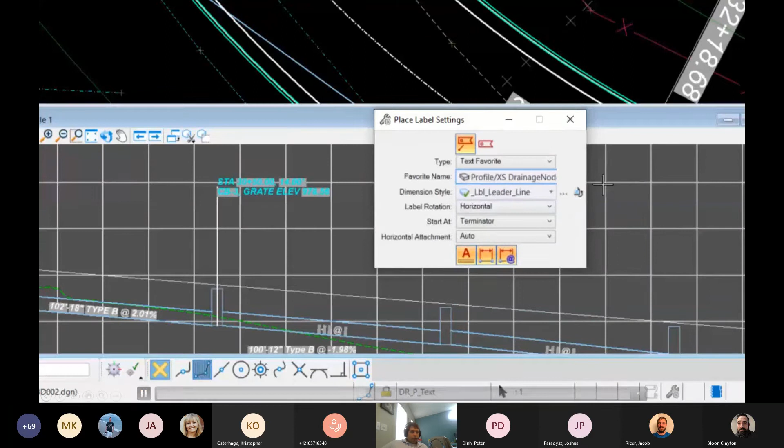Now we can still use text favorites to add that stuff in. So here I'm showing you I have a drainage node. Oh sorry, I'm getting ahead of myself. So if you didn't want to use element annotation, you want to use place labels, same thing with the conduits. I have these text favorites in here that you could use instead of using element annotation. So I come in here and I have one for drainage node proposed, which is what this is. I have one for if you have a manhole, so instead of saying grate, it'll say like rim elevation. And I'll get to the unformatted options later.

So this is the same thing as using it, it's another way to annotate the node. If you don't want to use element annotation and reassign those fields, you could just place a label, choose that text favorite, and then place it. So now when you do that, you don't have to reassign the fields.

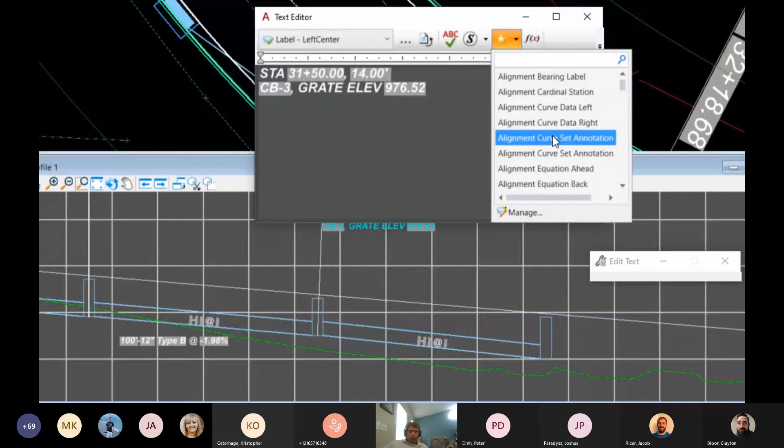Okay, but we still need the connected pipe info, which I was going to get to. So for the connected pipe, the way I have it set up for the workflow is you're just gonna go into the text editor and you're gonna insert text favorite. So I have stuff for the pipe end and pipe start for existing and proposed. This is the proposed side, so you'll see there is the drainage pipe end and pipe start.

And you need to know the direction you drew this in. This isn't the direction of flow, it's the actual what you drew in first and the direction you drew that. So if it's the start or if it's the end of that pipe, that's how it's pulling the elevation for that pipe. So in this case, I happen to know I drew this left to right, so I'm gonna put that in.

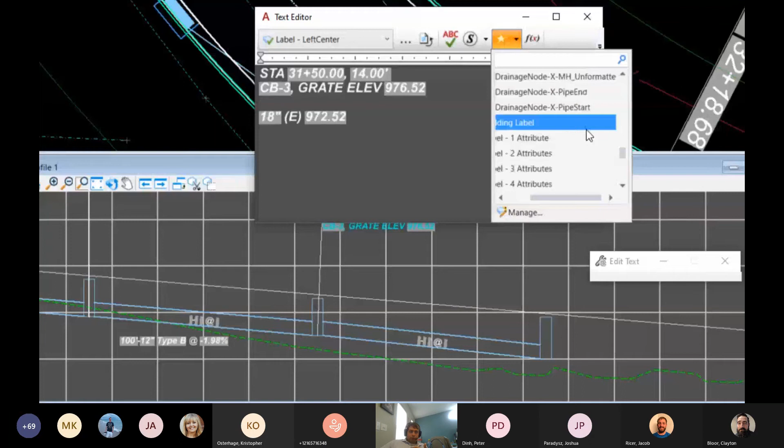After I put it in, since I'm in text editor, I do have to reassign the field. So I'm going to reassign those two fields to that given pipe. It's going to pull that elevation and size from that pipe. And then I just have to key in the direction, so it's going east, west, north, south, whatever. You can repeat this process for all the connecting pipes that you might have.

So this time I'll add that one in. Now this one was the end of the pipe, so again I have to remember to come in here and reassign to that actual pipe to pull those properties. And in the text element, I'm pulling properties from two different pipes and a node to pull all those values, but they're all still dynamic. So if I change anything, all that's going to update.

But as I said earlier, when you close and reopen the file, all these go to blank until you open a drainage properties dialog. Then it'll update, which is fine until you go to print, right? So I hate to do this, but to actually get it to print, we can't have those fields going to blank. So maybe when you're ready to print, select everything, copy and paste it, and that will switch everything back to just regular text.

Now, I hate this workflow, but at least that gets you so you don't have to go and look up each value, right? Now the huge downfall of this is it's no longer dynamic, there's no longer linked to anything, it's just plain text. But right now it's kind of a stopgap because we can't have those go to blank every time we go to print. So hopefully Bentley will fix that. I feel like they got to, it's a pretty big bug, right?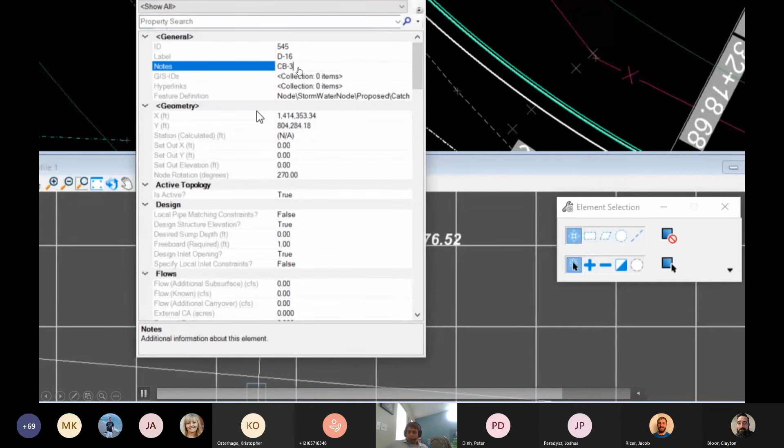The notes field, I am making use of that again for the nodes, just like I did for the conduit. So if you don't have the new DGNLib, those are not pre-populated. You can go to those flex tables or just select each node individually and fill that out.

And I think the rest is pretty self-explanatory of where everything's coming from. But I do want to call out the conduit length.

So I get a lot of comments on this. This length is node to node. Okay, I know that the physical distance is stopping at the center, but the way we pay is center to center. So that's what this value is.

So it's going to give you the value that we're used to seeing. Same thing with the slope - it's what we're used to seeing, the node to node slope. Okay, so don't get caught up on the physical drawing. The way I set these up are what we're used to seeing.

So real quick, cross sections, cross-section annotation - just to save time, I've already cut the sheets. I do want to note that we are not projecting the drainage to the nearest cross section. That capability has never existed in the software.

That's something that we built with our VBAs. And with the dynamic nature of the way the software works in ORD, it didn't really make sense to move those VBAs forward. So if you want to show drainage on cross sections, you're going to have to cut a cross section through that drainage structure for it to show up, because a cross section is a slice through that 3D model. So if it's there in the 3D model, it's going to show up in your cross section.

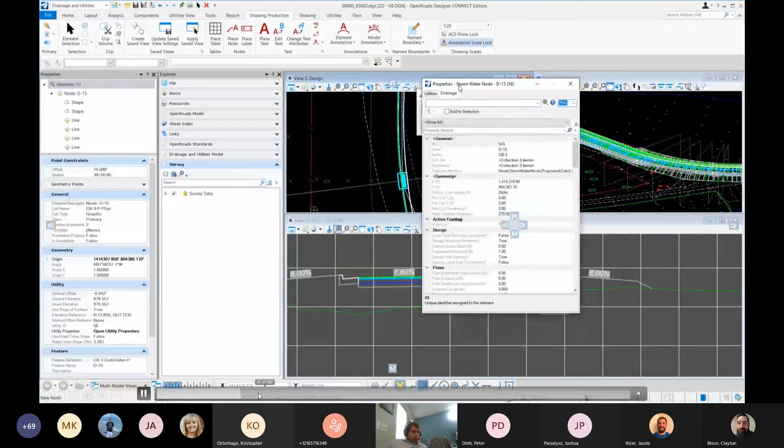So let me jump forward here a little bit. What I'm gonna do is place a label here, and you're gonna see I'm gonna choose the same label - see profile / cross section for drainage node. Those are the same. You do the same annotation for profile and cross section, right?

So I'm gonna select that. I'm gonna select my node. Now you have to make sure that you actually have the node selected, or the label won't know what element you're trying to tie to. So you gotta make sure you do have that node selected. Oh man, my bad.

So after you have it selected, in the section, I will say it's a little bit laggy - you'll notice it's a little laggy here. Placing annotation, that's another service request I have in with Bentley.

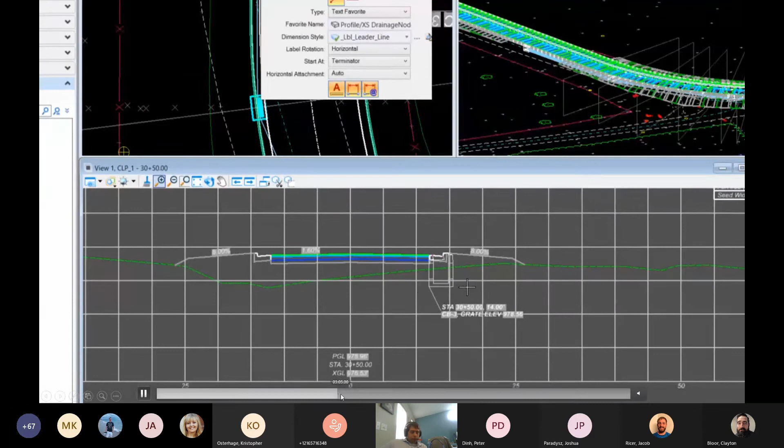But after you place it, pretty much the same thing here, but we don't have the connected pipes, right? Just like in profiles, we have to add those in. So what we can do is we need to basically temporarily show that pipe so that we can get the properties from that pipe using a text favorite. We need to be able to select that pipe.

So the way we can achieve that is selecting our named boundary here in our 3D model. And if we go and look at the properties of it, we can change the clip depth forward and backwards. So I'm going to change the back depth up 2.5 feet. So it's basically widening my clip - instead of being a thin slice, it's now a thick slice, right?

So your cross section is going to start to look weird. You've got multiple things going on because it's a thick slice. But what we do see is we now see that pipe. So now that I see that pipe, I can come in here and add that text favorite just like I did in the profile view. Again, you have to know if it's the start or the end of the pipe.

So I'm going to come down here and select that.

So pipe end or pipe start, you have to know that. The back clip is basically going back station. So if you know the direction of your station, then you know which pipe is being shown by the back or the forward clip.

So I'm going to put that text favorite in there. Again, I'm going to reassign those fields back to that pipe. And then I'm going to come back to my named boundary, and I'm going to show the clip depth the other way. So I'm going to, oh, I keep using my scroll wheel. My bad, guys.

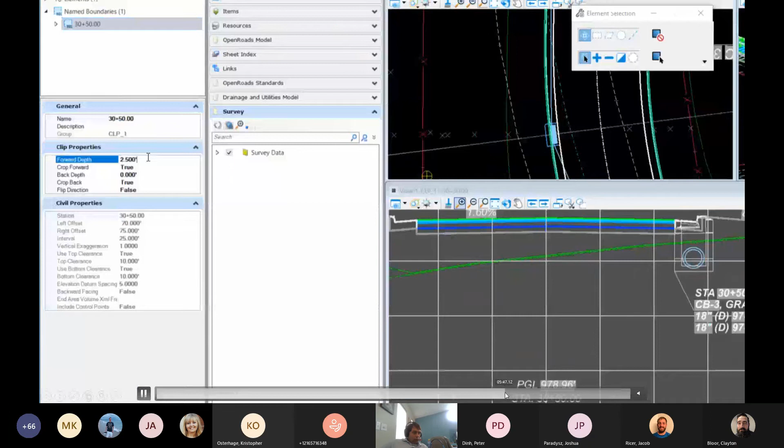Jump forward there. So a little bit too far. After you reassign, and I'm still too far. A little bit more. So now I'm getting rid of the back depth and I'm adding in the forward depth. So now I'm going to see that forward pipe. All right, and I'm going to do the same thing.

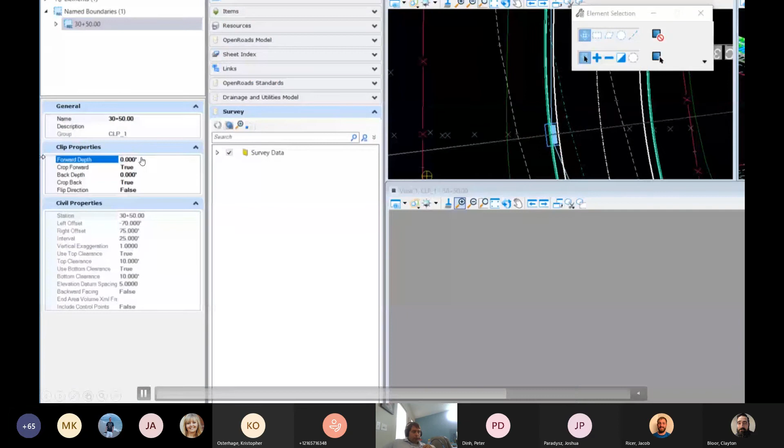I'm going to add that text favorite. I'm going to reassign the fields to that pipe. Excuse me. Jump forward a little bit. So we're going to reassign to this pipe now. And then I'm going to come back to my named boundary and I'm going to get rid of that depth. Okay, so now we see those properties.

Okay, so now for other cross sections, I'm going to jump over. I'm going to just change my view setup to view a different model. And so this one just shows a pipe. So this one, we do have a different text favorite since we don't show the slope like we do in a profile. So if you go to the cross section drainage pipe, there's a proposed and an existing one, and those are pretty much just going to pull the size and then the type.

So again, it's a little sluggish in the cross section for some reason, but that's how you can kind of annotate those pipes. Just so, again, type B is coming from that notes property. Okay, that is cross section.

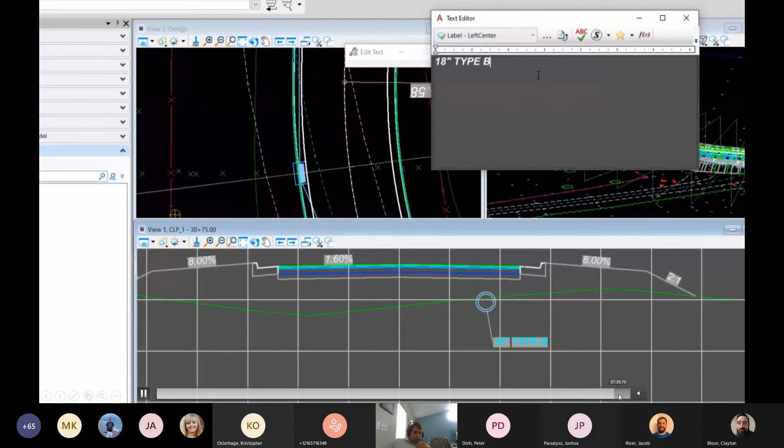So there, I kind of went over annotating plan, profile, cross section. I know that it's not perfect, especially with having to switch it to plain text just to print it because of that. Whenever you're cross referencing, the only other option is to just do all your sheets inside your drainage base map, because then you're not cross referencing, which I can't see people really doing. But that would alleviate that text field update issue.

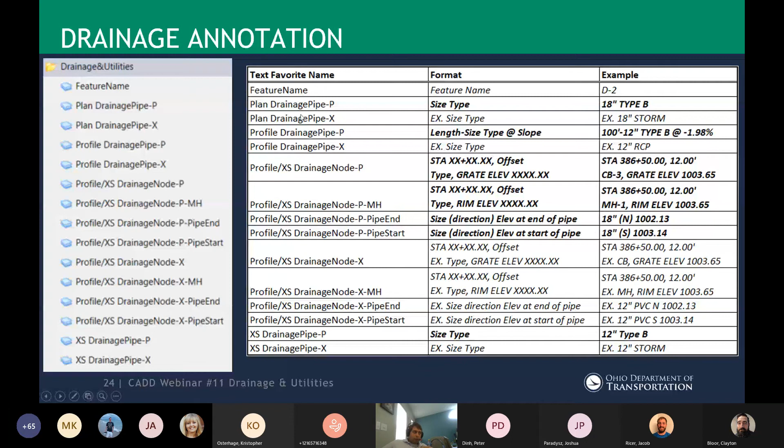So what text favorites do we have out there? I put this slide in here to kind of show you everything we have out there, and it gives you the format and then an example of what it kind of looks like. I probably will put this out as an Excel file when I push out the new DGNLib, but these are technically already out there for use. They've been out there for months.

Another thing I want to call out about annotation is it's going to look a little different, especially like the station offset. Right now I can't do left or right. That is an enhancement I have pretty high priority with Bentley, so that we can label these left or right. Right now it's just going to be positive or negative. So if you don't like that, you're going to have to just key it in. But they are going to look a little different.

But I really want to call out this elevation, it's really important that you guys know what the start and stop of a pipe is, or you're going to call out the wrong elevation. I know that part sucks. That's also another enhancement I have in with Bentley to basically expose all that information on the node, because then that opens the door to just annotate everything off the element, which is really what I'm trying to get to, so that you don't have to do any work. You really just select your elements and they just annotate.

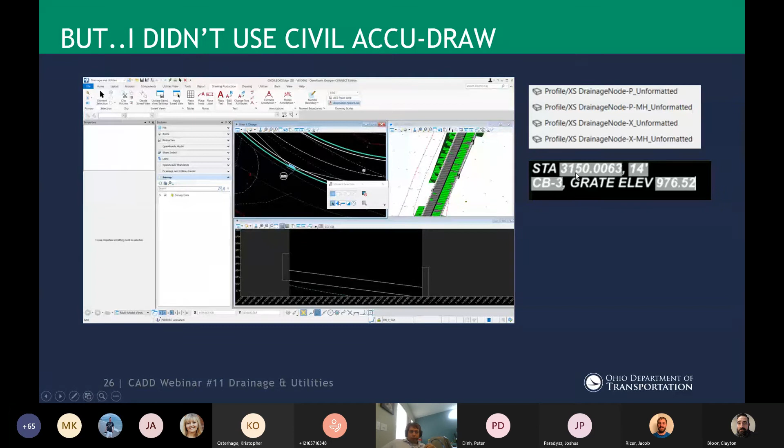We'll get there. Okay, so what if I didn't use Civil AccuDraw? How the heck am I going to get station offset? So I have created these unformatted text favorites, and they're going to look like this. And basically, I guess I'll start the video here.

So what I plan on using in the future is once I get a bug fix, we won't have to worry if it was placed with Civil AccuDraw anymore. That's what we're trying to work to - I don't care how it's placed. Like if it's existing and I extracted it from an element, obviously I won't use Civil AccuDraw. So I don't want my annotation to be dependent on how I placed it.

Bentley has the capability to add a station offset reference to your nodes. So if I select this node and look at the properties, there's a station offset reference, which I already set. But you can click on that property, click the three dots, and go select an alignment. You can also create a selection set, select all your nodes, and bulk set them all to one alignment at one time to save some time.

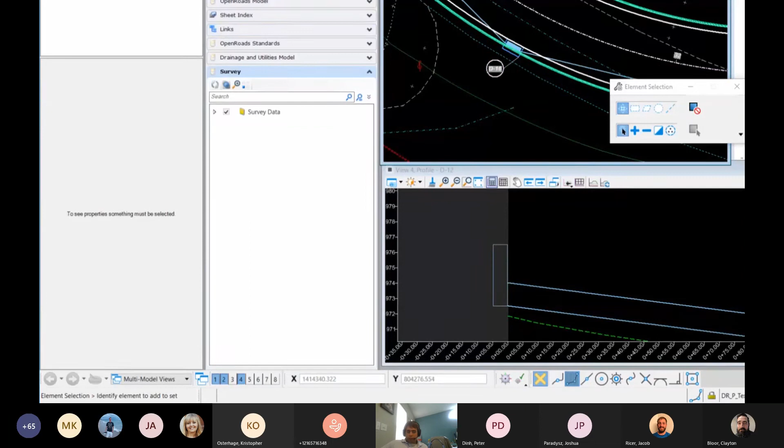But once you have that assigned, that node now has the ability to annotate station and offset, but I can't format it. That's why I added this unformatted text favorites.

So if I come in and place a text favorite here or a label - let me jump forward a bit since we're running out of time - I'm going to place a label, and now choose one of those unformatted options. So there's an unformatted option, and then you have one for manhole as well. What these unformatted ones do, instead of using that Civil AccuDraw station offset for the properties, is actually pull that station offset reference that we just added.

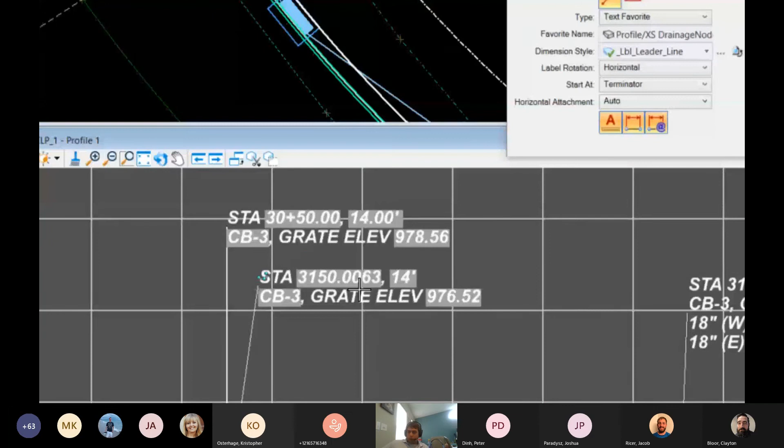But you'll notice it's formatted as a number and not as a station. That's a simple formatting bug that I have in with Bentley. Hopefully they get that fixed in the next release, because then we could just switch to using that, and we won't have to worry about Civil AccuDraw anymore.

So the workflow is you can use this to get the value, so you don't have to go and look up the values, and then you can just type over it. Not great, but I guess that's the best I could come up with if you didn't use Civil AccuDraw. Eventually I'd like to go that way completely once I get that formatting fixed, but hopefully that gives you guys something to go with, just in case you didn't use Civil AccuDraw.

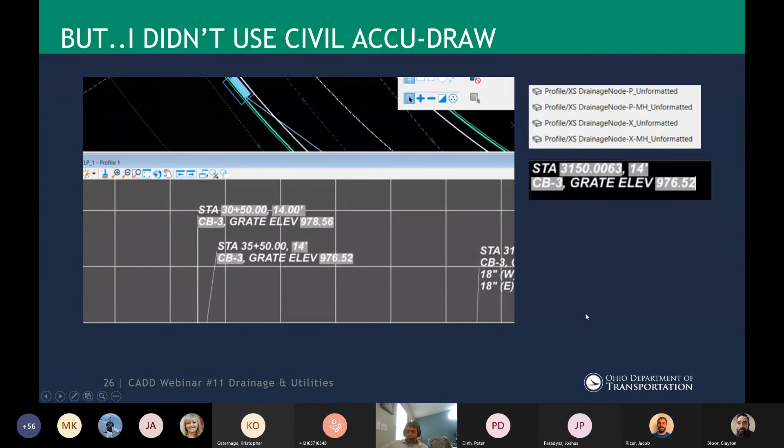I get that a lot - 'I didn't use Civil AccuDraw, how am I going to annotate station offset?' And I know nobody wants to go and hand-look up what station that was. So this kind of gets you the values at least, and then you just have to type over it. Now again, when you type over it, it's no longer dynamic. So definitely a lot of stopgaps here to get us going. Hopefully in the next release or so, all these things get cleared up and it's smooth sailing.

Hopefully this is beneficial to you guys. I'll open it up to questions now - I'm sure you guys probably have lots of questions.